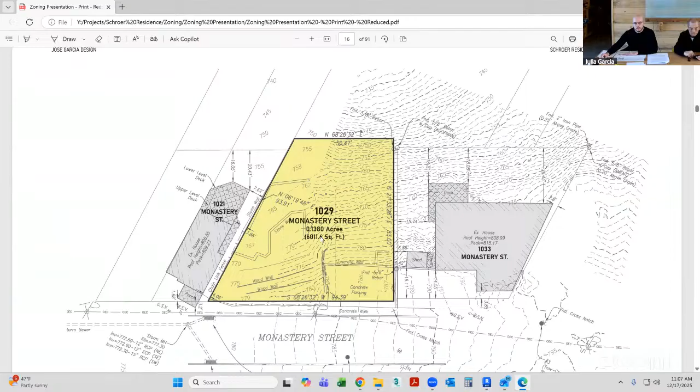We will start by introducing the site. The lot, located at 1029 Monastery Street, was previously owned by Tony Scemama. That residential lot used to be divided into 3 separate lots, which were then consolidated by Mr. Scemama into one single family residential lot.

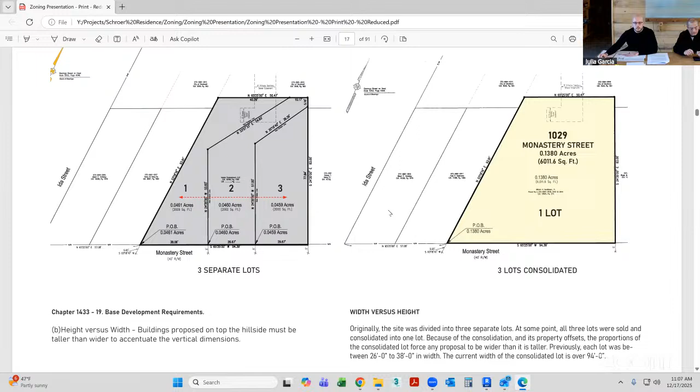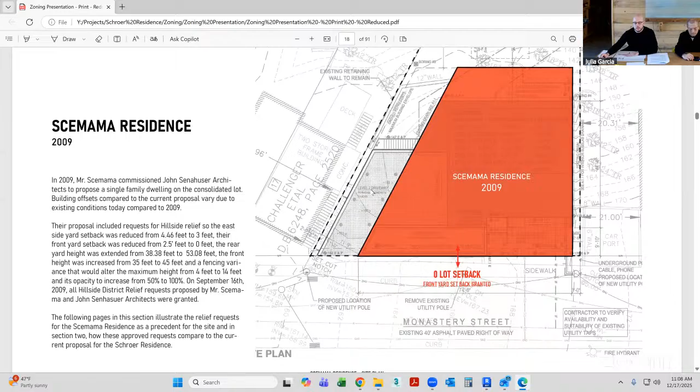When the lot was consolidated in 2009, Mr. Scemama went to John Senhauser and requested a proposal for a large family residence. In that proposal, they requested several items of relief for zoning: a height variance in the front off Monastery Street facing south of 45 feet compared to the allowed 35 feet, a variance in the rear to 53 feet where 38 feet was allowed, and a 0 lot line on Monastery Street in the front.

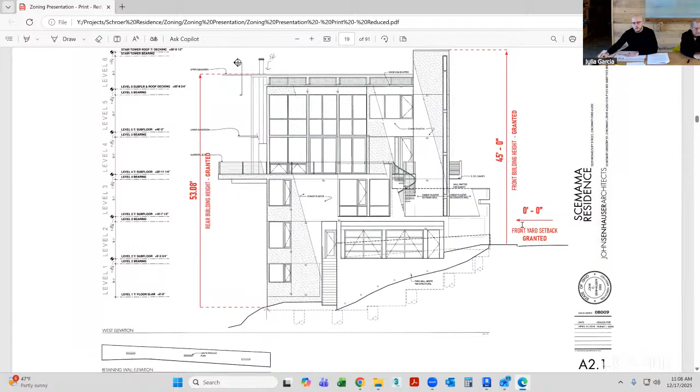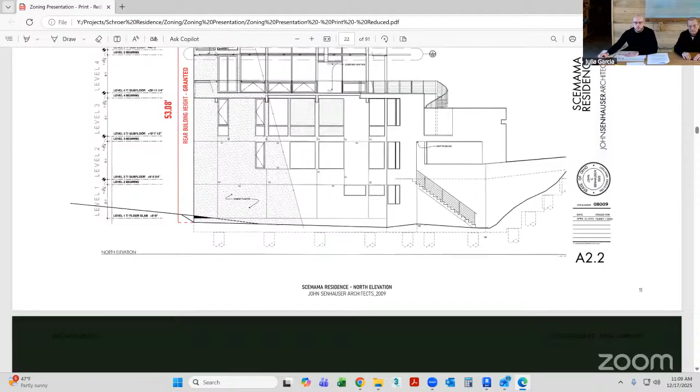At the time, that would have been close to 10 feet above the allowed height in the front, and an additional 14.7 feet in the rear. Eventually, that proposal went through the zoning hearing and all recommendations were to approve all the variances and relief requests. Unfortunately for that lot, John Senhauser's plans did not move forward and the project went away, so the lot remained vacant.

So previously the lot was vacant, this proposal happened, and then the proposal did not go through. Therefore, the lot has since remained vacant. For over 30 years, the lot has been vacant and a blight on Monastery Street in Mount Adams.

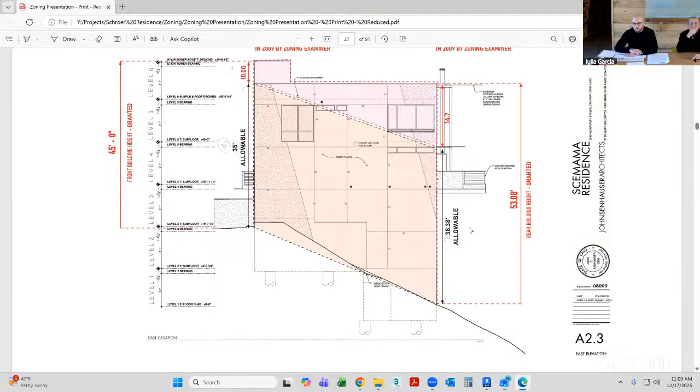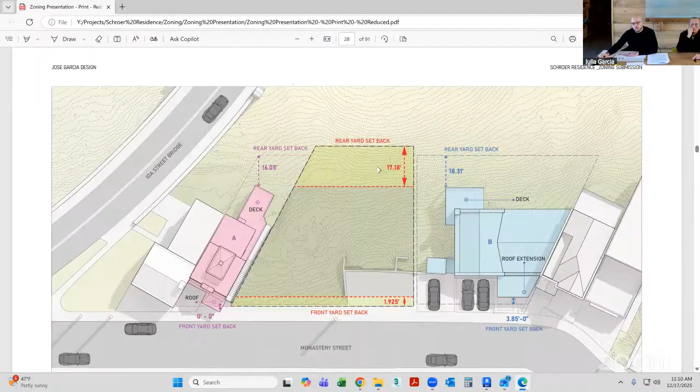Now the lot is under ownership of Mike and Carrie Schroer. The lot is still consolidated, and based on the existing conditions now, which are different than in 2009, our required setback to the east is 2 feet, to the west is 3 feet 2.5 inches, to the north is 17.18 feet, and to the front it's 1.925 feet.

These setbacks establish the allowable building footprint for us. Based on the zoning code, what's allowed in the front is still 35 feet, and in the rear what's allowed is 42.75 feet. Those criteria establish our building footprint and building height, which make up the building envelope allowed on this site.

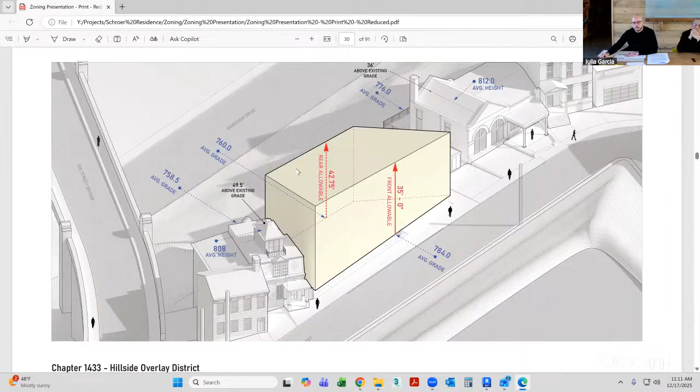Based on that envelope, only so much of the top floor square footage is buildable—39% to be exact. So more than half of the top area of the site within the envelope is not buildable. As we go through the slides, we're asking for relief in the height of the building to meet the requirements for the owner's needs.

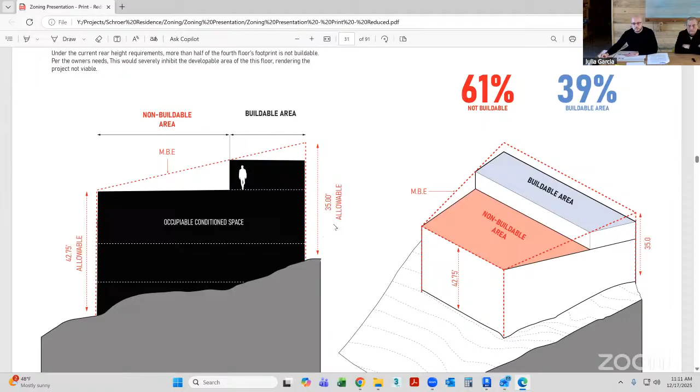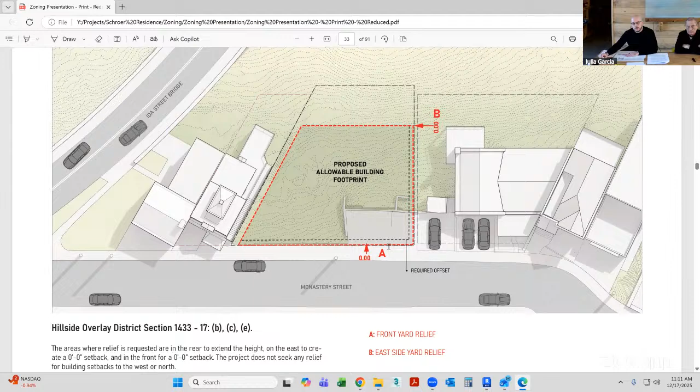The other requirements we're asking for: a 0 lot line on the east, which is a 2 foot relief to the east, and we're also asking for 2 feet of relief to the south, giving us a 0 lot line to the south on Monastery.

In height, we're asking for 10.75 feet of relief above what's allowable. We are allowed 47.25 feet at this point, and we're asking for an additional 10.75 feet to make the house viable and to meet and support the needs of the current owner.

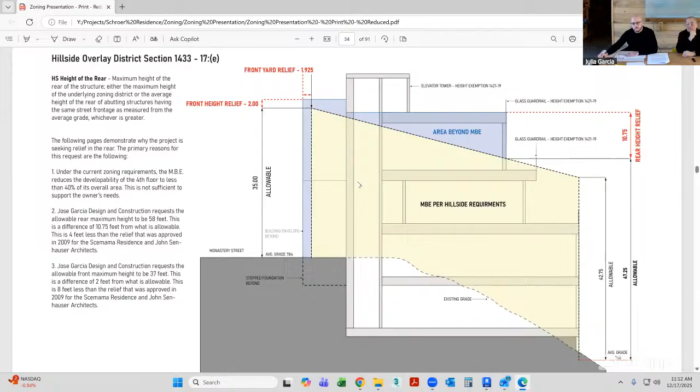We're also asking for an additional 2 feet of relief in the height off Monastery Street, from 35 to 37. Compared to the proposal and precedent set in 2009, where all relief requests were granted, we have less of a relief request in the rear by approximately 4 feet, and less in the front by approximately 8 feet. Again, all the relief requests in 2009 were approved.

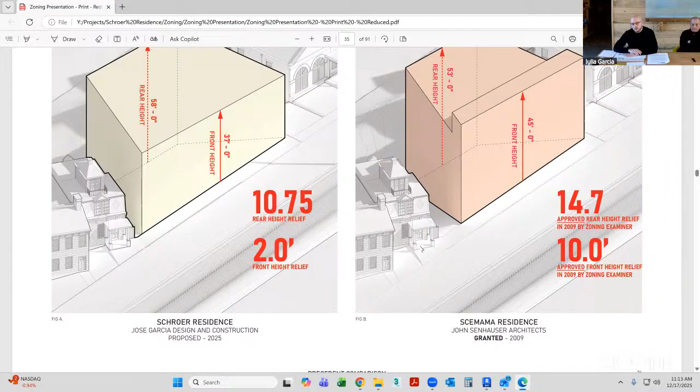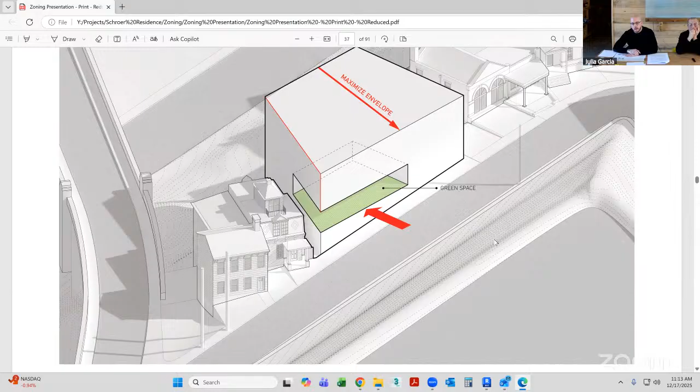So there's a step-by-step of what we're doing with the mass. We're going to try to maximize the envelope, but push back off Monastery Street to provide some green space. We're carving in off Monastery Street to provide car access directly off Monastery for the owner, and also carving in from the east to provide street access and steps up into the house. That relief creates a green space off Monastery Street.

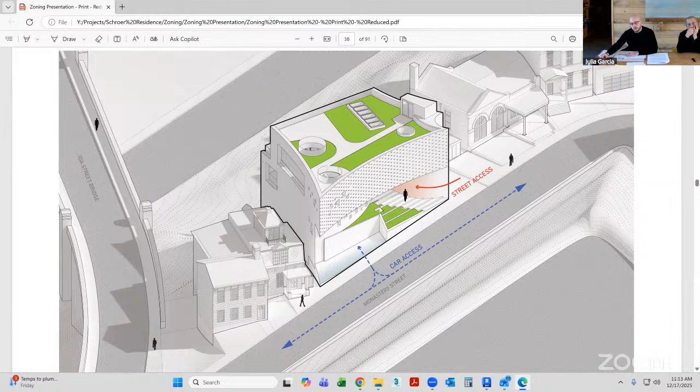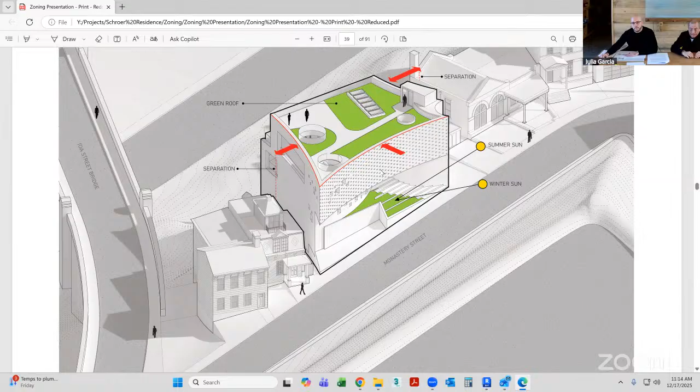At the top level, we're pushing in on the south, the west, and the east to create more relief and separation between the neighbors. More importantly, in the back, in the rear, where we're asking for the height, we're stepping the house. This coincides with the hillside design requirements.

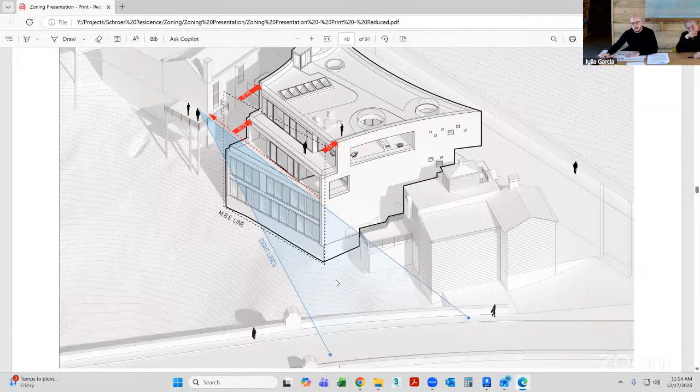You can see here in this black dashed line where we are legally allowed to bring the building out. We are stepping the house back instead, to preserve the view for the neighbor to the east, so they have a clear line of sight down to the Ida Street Bridge, to Music Hall, and to the Cincinnati Museum Center. We're also stepping it back again at the top. Overall, we're giving up close to 17 feet 9 inches from what we could legally take.

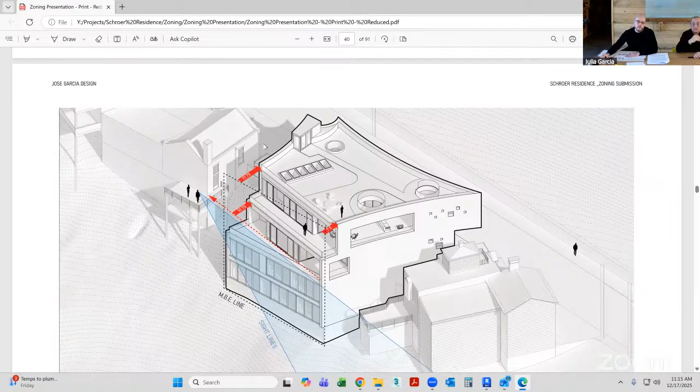Because we are stepping this house back and giving up square footage, we're asking to have that square footage back in the front and to the east—2 feet to the east and 2 feet to the south.

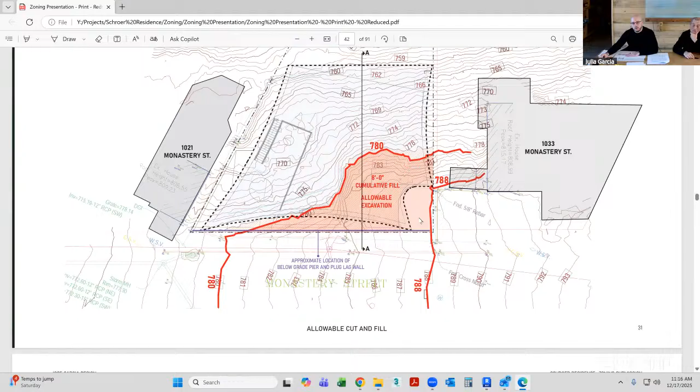Another part of the relief that we're asking for is the cumulative cut fill in the project. Under current conditions, we're only allowed to take 8 feet of cumulative fill. Starting where the house begins at 788, we would only be allowed to cut down to 780. That only leaves a very small percentage of the site that would be allowed to be excavated. Because the topography is so deep and steep within this area, that area alone is not viable for building.

We are asking that we are allowed to excavate to the point of 758 and use the footprint that is established by the hillside standards that says this is the area in which we can build. However, we would need some relief to do that, to go down to this point to excavate.

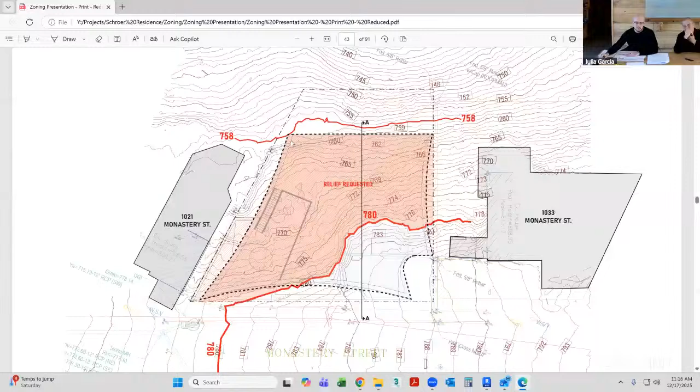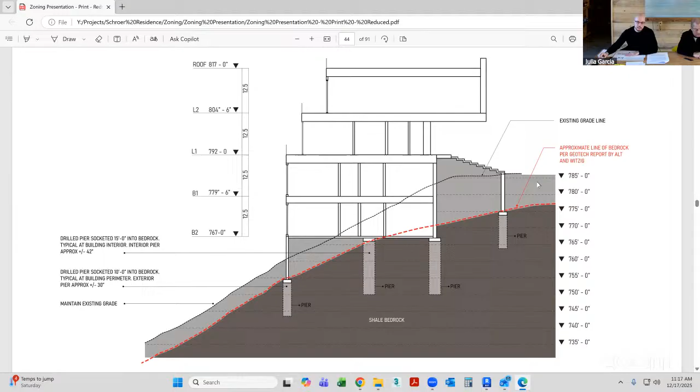As we excavate, the house foundation steps so that we do not have any major vertical cliff-like surfaces. The foundation is going to be piered into the hillside, and as it begins to go down, it steps with the hillside. This is the existing grade that we have now. This red line represents where the bedrock is currently at, based on the geotech report done by Alt and Witzig. We propose that once we're done, we would also maintain the existing grade of the current site.

This is important because not only is the stepping meeting the hillside standards, but more importantly, based on the current cut and fill requirements, only 21% of the site is developable, 79% of it is not. So to meet the footprint, we're asking for additional relief for the cut and the fill.

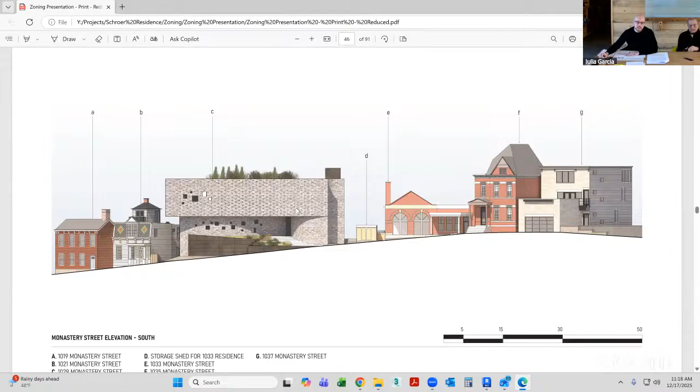As you can see here in this elevation, the foundation is stepped down across the hillside, and there's terracing also happening to provide garden terraces to the north and to help preserve views from neighbors so that they can also see down to Ida Street Bridge, to the Museum Center, and to Music Hall.

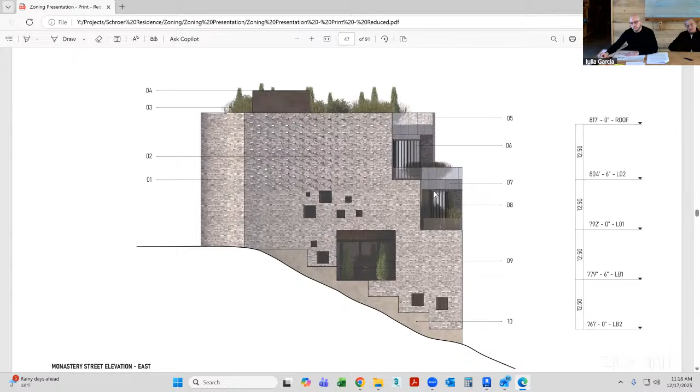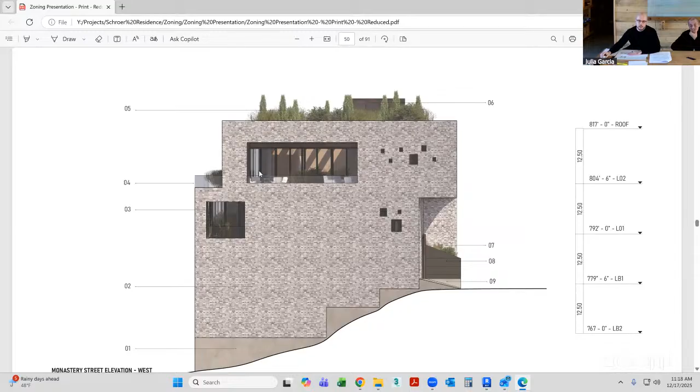You have large openings in the facade to allow for views out down towards the valley and for natural light into the building. And we're using materials that are consistent with materials that are on Monastery Street.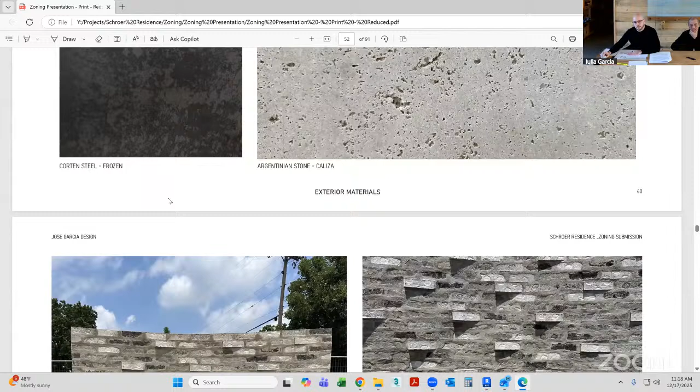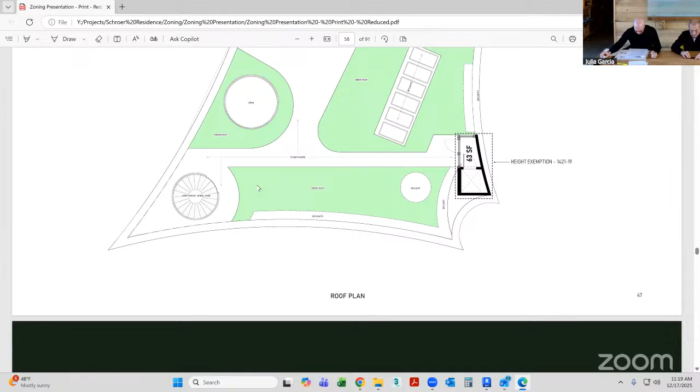We believe, based on the design proposal that we have, that we are meeting the hillside standards that avoid major cuts in the hillside because it's stepping. We are minimizing the excavation required for the project by doing piers. We are maintaining a clear sense of the brow by stepping back off the hill.

Based on the project that we're proposing now in the massing, based on the Live Section Plan of Cincinnati and the action step to improve the quality and number of moderate to high income rental structures, the project improves the quality and number of moderate to high income rental and homeowners in the area. This coincides with the Live Section Plan established by Cincinnati in 2012.

In addition to the document presented, along with the massing that we currently have for a single family residence, if a non-single family residence were to be built here, say a developer were to come in and purchase this site, they could build 3 buildings that take on 4 units. So you could have 12 units built here with no separation between those units. And they would be required to not provide any off-street parking. Therefore, it would be harmful to the site if a developer were to build here.

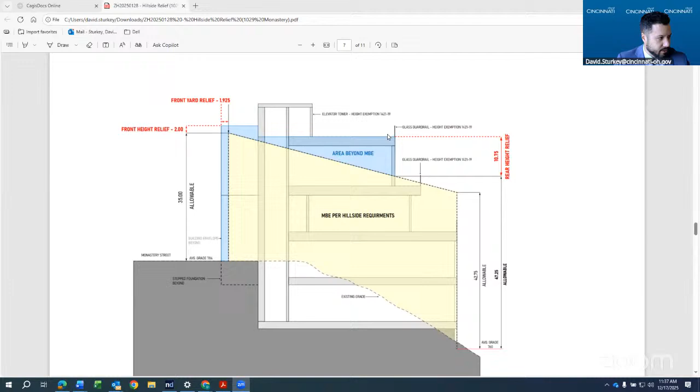I think this is a similar image shared before. So we're saying front height relief of 2 feet here, and rear height relief of 10.75 from here to here, and that excludes the elevator tower here—is that right, Tre? That is correct. I originally had it as 2 feet of relief to 37 feet called out as a separate item of relief, and for some reason, in the final edit, I believe it just showed one relief number instead of separate relief for the front and the rear.

Okay, got it. But I hope that makes sense—this drawing does a decent job of depicting it. If they were just going straight up without the stepped part, with the terraces and so on, you'd be measuring at a different point. So if this went all the way up here, is that what you're saying? Yes, you'd end up with an additional 5.5 feet or so of relief beyond what's being requested if you didn't have the stepping.

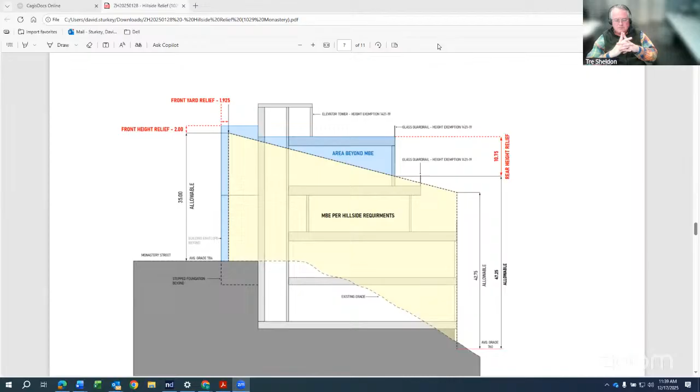Thanks, Tre. And Mr. Fritsch, I'll give you an opportunity to respond to all of the comments you've heard here from the public and from Tre. But Tre, is there anything else you wanted to add in terms of comments?

At least for me, trying to work with them, I know it's a balance between what the homeowners were seeking in terms of massing. I do think it's a better project in terms of the hillside from what it started out as. I began to work with Aaron and Jose, or they had a preliminary meeting with me many months ago about this project, and I will say that steps were taken. I agree it is a large dwelling, but steps were taken over time, including the stepping of the terraces and the opening up of the design.